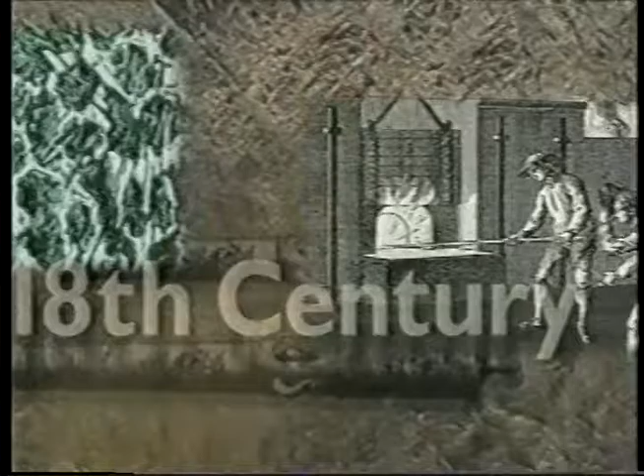Whiteheart malleable iron developed in France. Blackheart malleable iron developed in the U.S. Steel casting process developed in U.S. and Europe. The ancient art of heat treatment is scientifically studied. A novel new heat treatment called austempering is patented by Davenport and Bain in the U.S. The austempered microstructure in cast iron is first documented by Flynn and others.

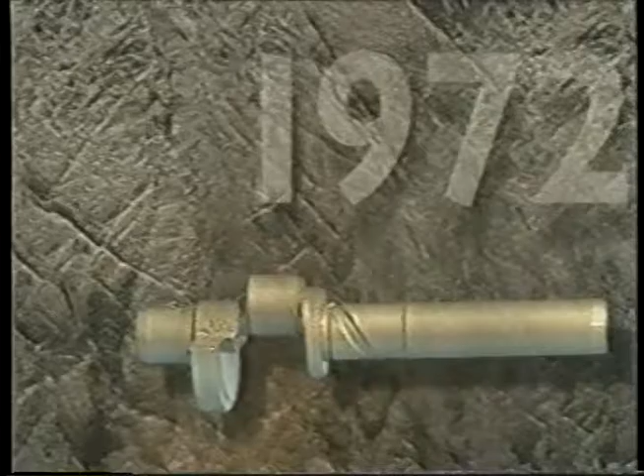Ductile spheroidal graphite iron developed concurrently in the U.S. by Millis and in the U.K. by Morrogh. First production ADI component designed and engineered by Tecumseh Products and produced by Wagner Casting Company. General Motors installs ADI rear differential gear sets in passenger cars, realizing a 20% cost savings.

Specialized high-volume batch austempering equipment developed by Applied Process Incorporated and Atmosphere Furnace Company. ASTM specifies 5 standard grades of ADI in both English and metric units. After centuries of metallurgical evolution and decades of equipment technology development, the focused efforts of scientists and engineers have brought these technologies together as ADI, the new benchmark material.

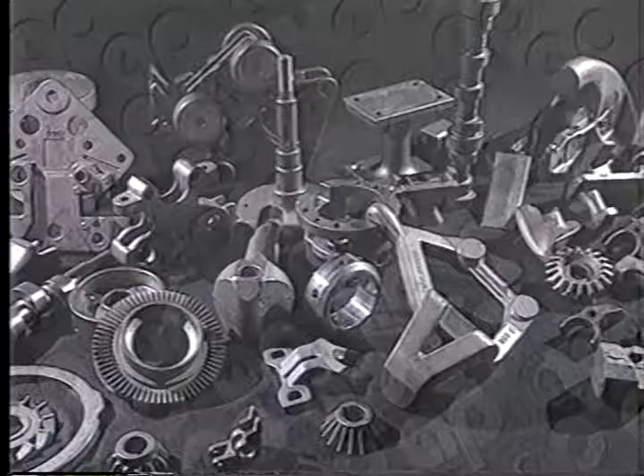Today, there is an increasing demand for these high-performance ADI components, and Applied Process Technologies Division and its affiliates are meeting that demand worldwide, with U.S. locations in Michigan, Wisconsin, and Kentucky, and international affiliates in England and Australia.

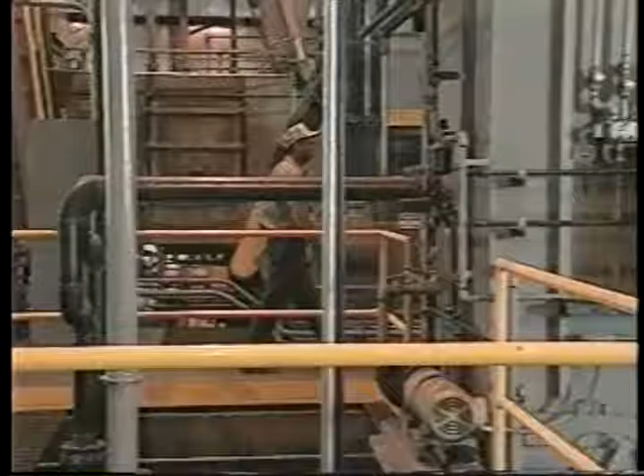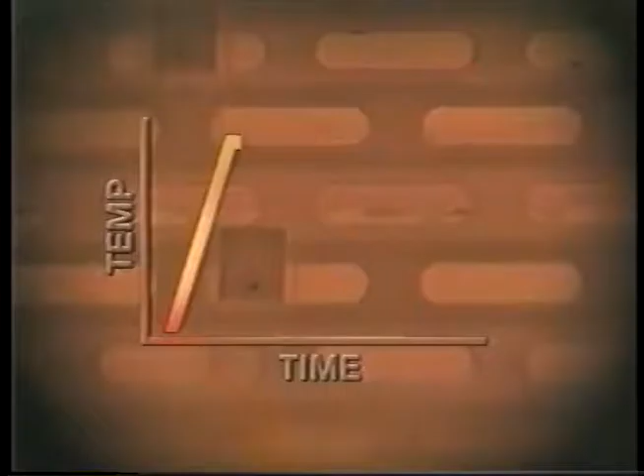The austempering process is a specialized heat treatment. When applied to ductile iron, it consists of the following. Heating the component to a suitable temperature in the range of 825 to 950 degrees centigrade. Holding the component at that temperature for a time sufficient to homogenize the structure. Rapidly cooling the part to the appropriate austempering temperature in the range of 175 to 400 degrees centigrade.

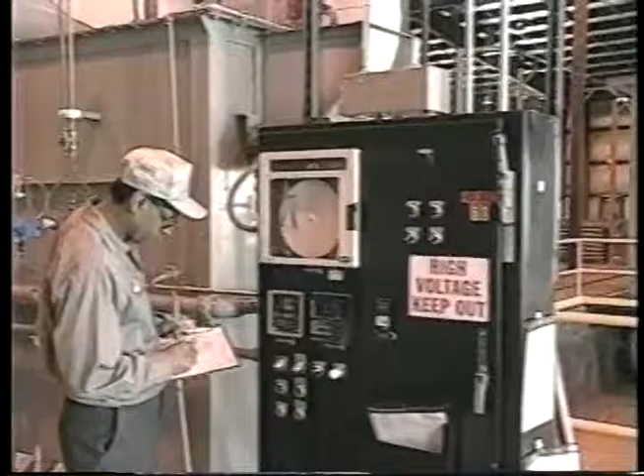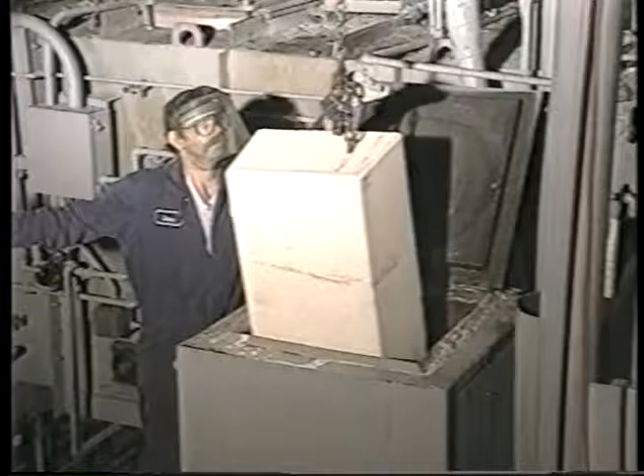Holding the component at the austempering temperature for the time necessary to produce the desired ausferrite matrix and then cooling to room temperature. This can be accomplished in various types of equipment, such as this atmosphere furnace with a specially pressurized integral quench using molten nitrate nitrite salt that is non-toxic and 100% recyclable.

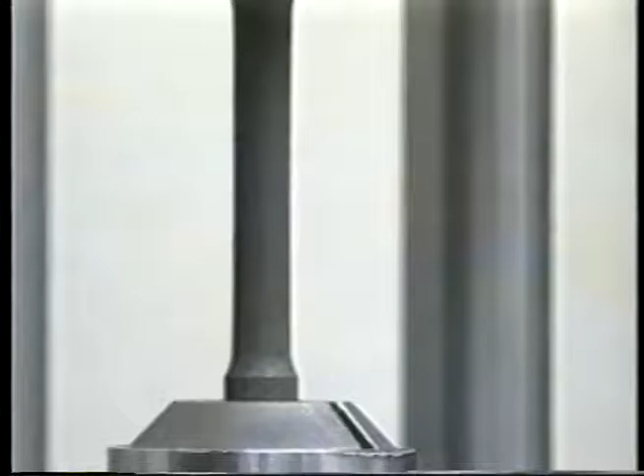The austempering cycle is affected by the component's configuration and the chemical and microstructural characteristics of the iron. Therefore, the knowledgeable heat treater provides an added benefit for the foundry, the machining source, and the end user at meetings held early in the design cycle.

By quantifying, testing, and establishing the correct material process combination for the specific product, the optimum process and property results are achieved. Using specially designed equipment and advanced process control techniques, the heat treater assures lot-to-lot consistency of the product and delivers the desired high-performance properties of the material.

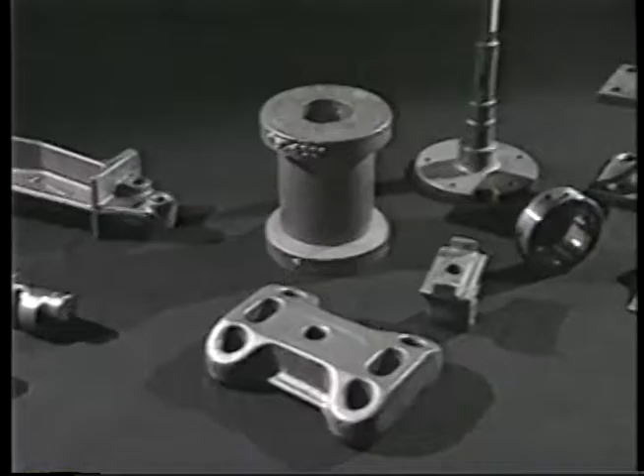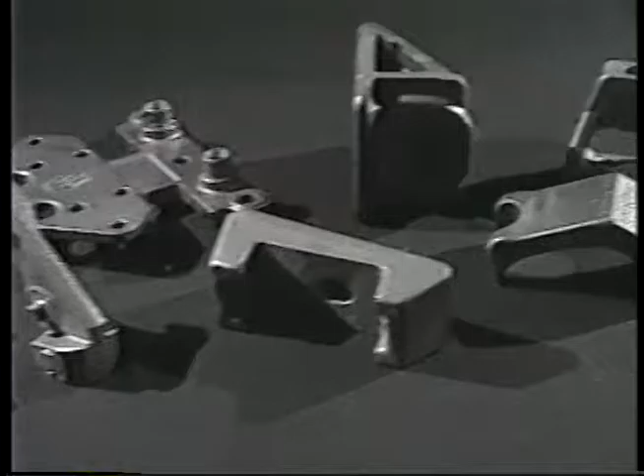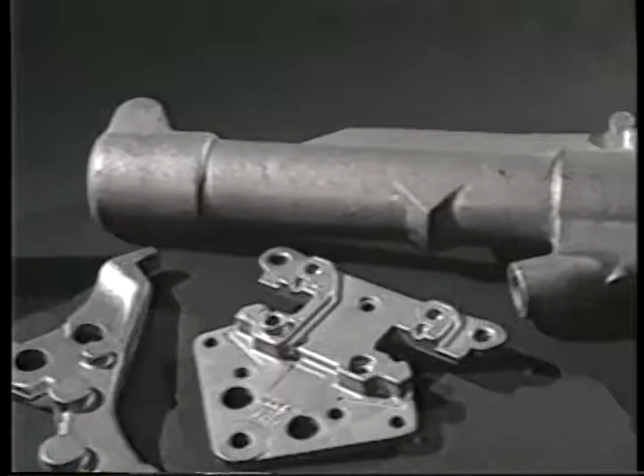Compared with conventional grades of ductile iron, ADI has over twice the strength for a given level of ductility. ADI has remarkable wear resistance for a given hardness level when compared with other materials. The ductile iron casting process uses recycled ferrous materials. Ductile iron can be easily cast into complex shapes. Therefore, ductile iron is a near net-shape technology.

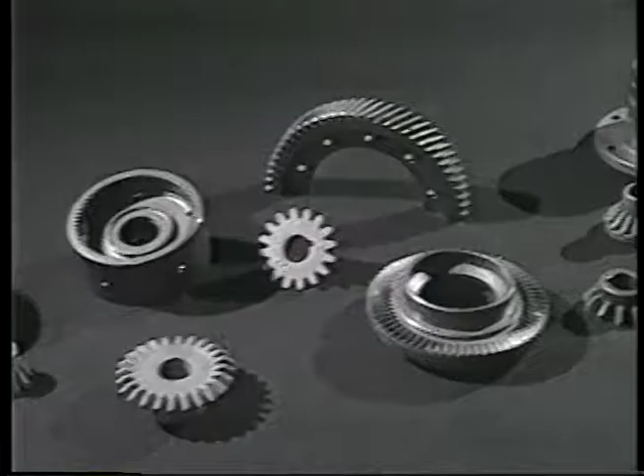In turn, the austempering process produces highly repeatable dimensional response, thus giving the manufacturer significant flexibility in manufacturing. ADI has excellent dynamic properties, which can be greatly enhanced by fillet rolling, shot peening, and grinding. Its gear properties make it competitive with carburized steel. ADI's noise damping capabilities provide quieter running components that are superior to both steel and aluminum.

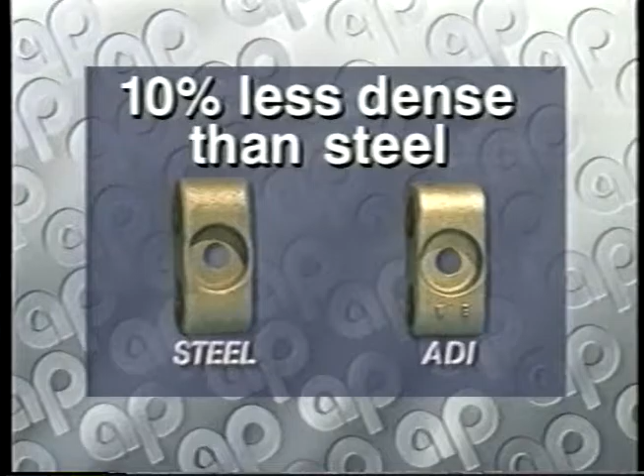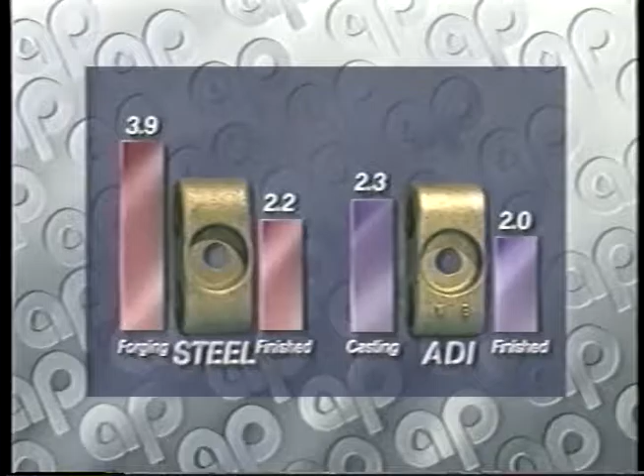ADI is 10% less dense than steel. Thus, even for a given shape, an ADI component will be 10% lighter. Because of its excellent castability, ductile iron can be cast to a nearer net shape than either a steel casting or a forging. Therefore, not only will you buy less material, you will machine away less, and the resultant part will be lighter in weight.

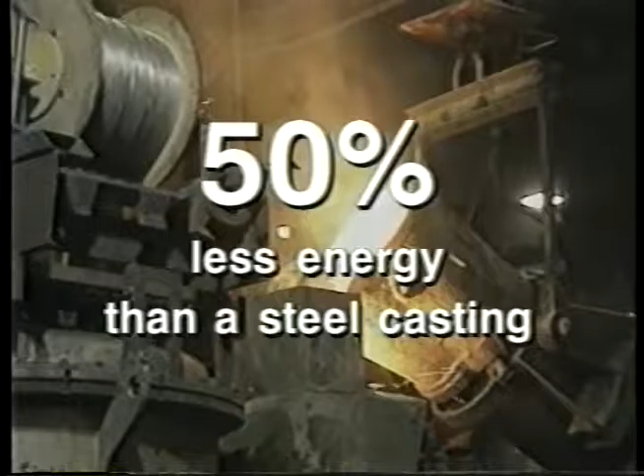An ADI component uses 50% less energy per unit of weight to produce than a steel casting, and 80% less energy than a steel forging. And ADI is stronger than microalloyed forged steel with comparable fracture toughness.

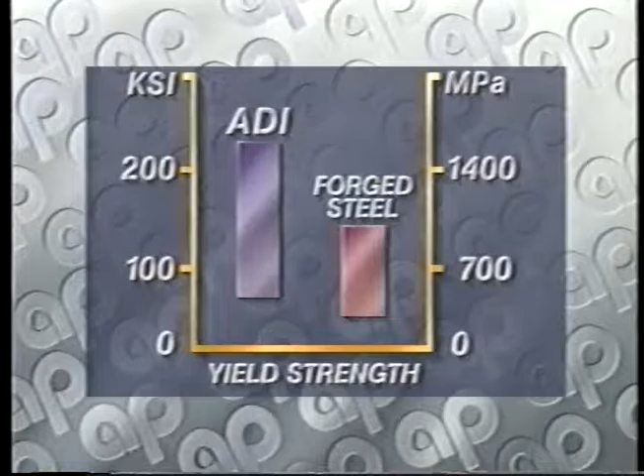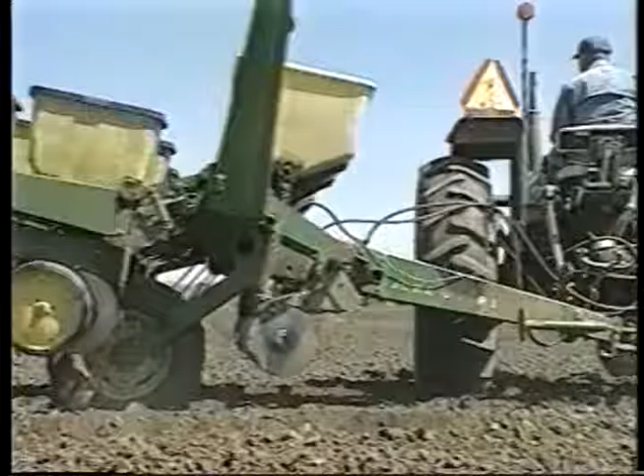Because of ADI's unique ausferrite matrix, for a given level of hardness, it will exhibit significantly better wear resistance than conventionally hardened steel. ADI has successfully replaced manganese steel and carburized steel in many wear applications.

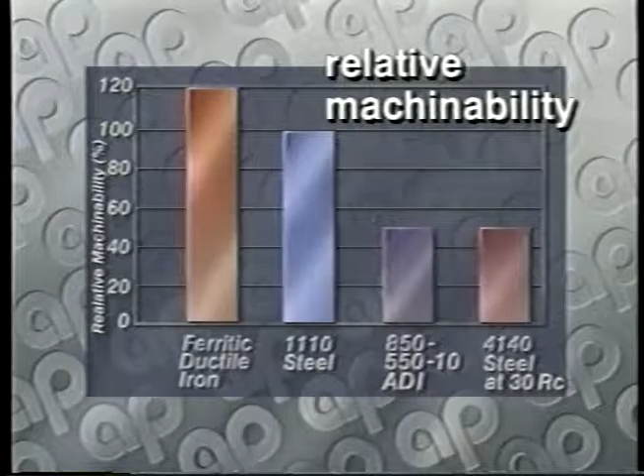Ferritic ductile iron has better machinability than even free machining steel, creating significant savings in the machining process. By machining components in the ferritic condition and austempering after machining, machine feeds and speeds are increased and tool lives are greatly extended. In addition, machining of ductile iron produces a small discontinuous chip that can be easily stored and recycled.

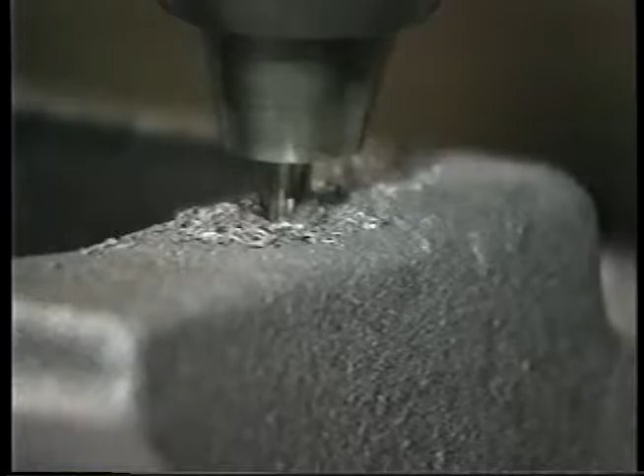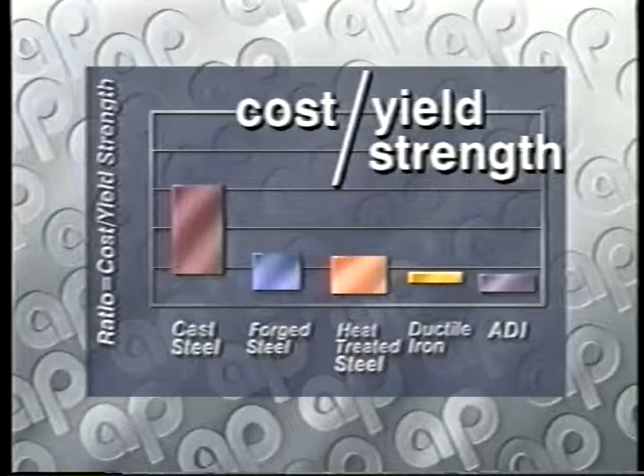While prices vary worldwide, on average, ductile iron castings cost significantly less than steel castings or forgings. In North America, when the cost of austempering and transportation is added, the price of an ADI component is typically 20% less than a comparable steel forging or casting. Additional savings are realized by machining in a soft, as-cast condition.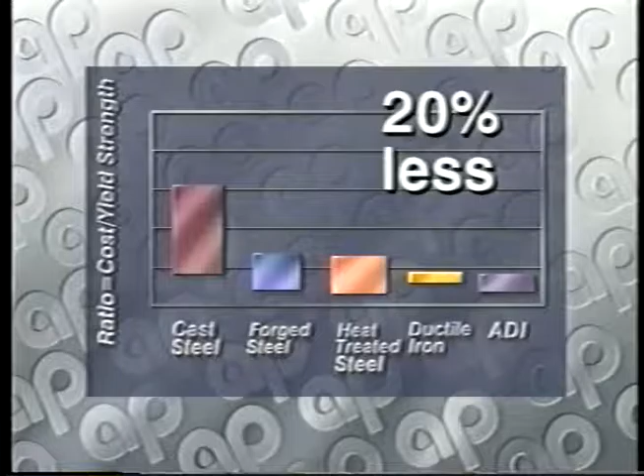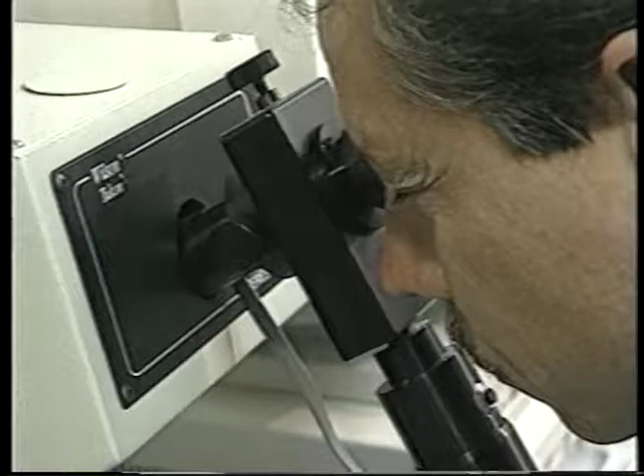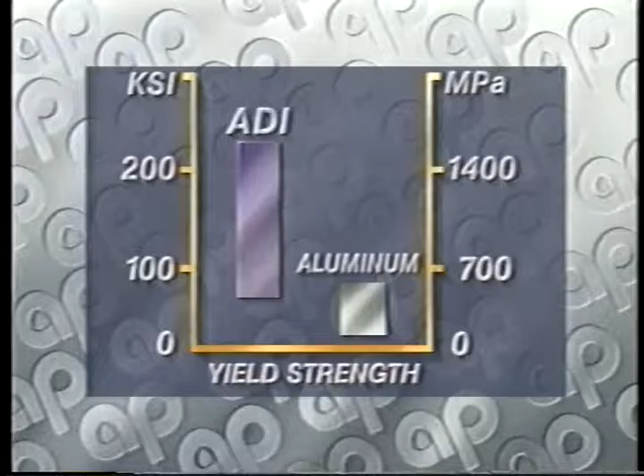Today, when one thinks of lightweight materials, aluminum comes readily to mind. But low density alone does not necessarily make the lightest component. ADI is typically more than 3 times as strong as the best aluminum castings and forgings, and ADI weighs only 2.5 times as much. Additionally, ADI has over twice the stiffness of aluminum. That means that a properly designed ADI part can replace an aluminum part at a weight savings. Given that aluminum can cost up to 10 times as much per unit weight, the cost benefits of ADI become apparent.

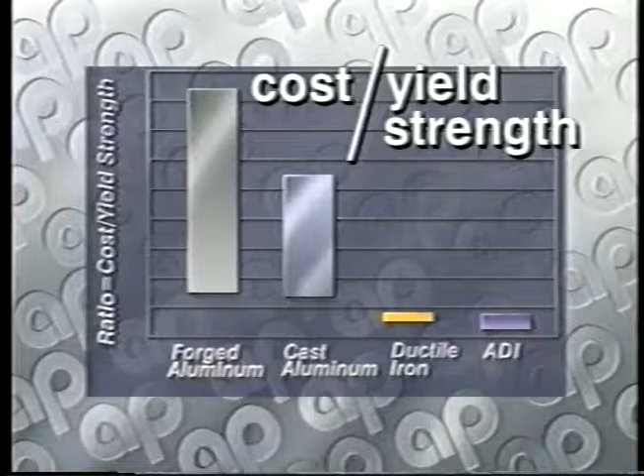ADI is now being applied in virtually all markets. The heavy truck industry utilizes ADI components in suspensions, engines, transmissions, wheel hubs, and bracketry. The light car and truck industry utilizes ADI for camshafts, crankshafts, timing gears, suspension components, constant velocity joints, differential cases, differential gear sets, and transmission components.

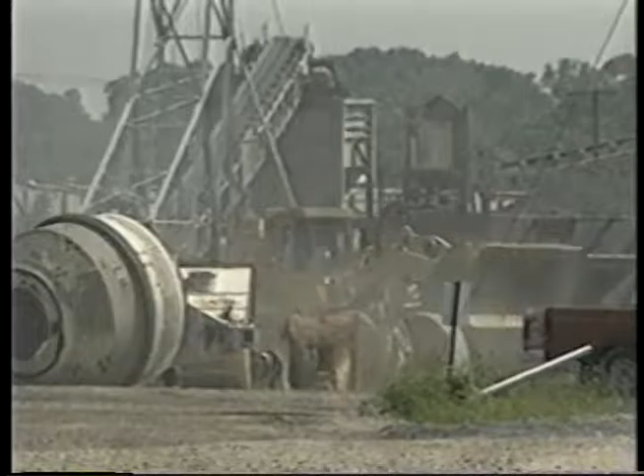The construction and mining industries employ ADI components for bucket teeth, chain sprockets, ore crushers, jackhammers, bridge and highway parts, ground engaging and structural components, and a wide array of hardware. The industrial and material handling industries utilize ADI for conveyor components, pump components, structural components, wear plates, trolleys, gears, and other hardware. The railroad industry uses ADI for suspension components, car wheels, maintenance vehicle components, and truck and car hardware.

The agricultural industry uses ADI for plow points, till points, fertilizer knives, PTO components, grain transport and grinding, and tractor and implement components. The defense industry is utilizing ADI for medium-duty track and suspension components and various armor and ordnance applications.

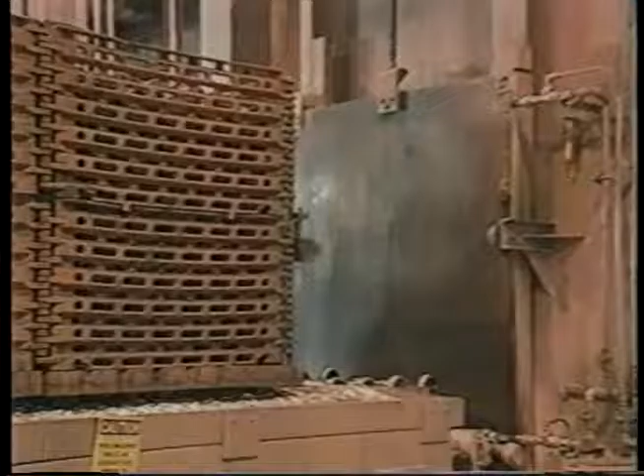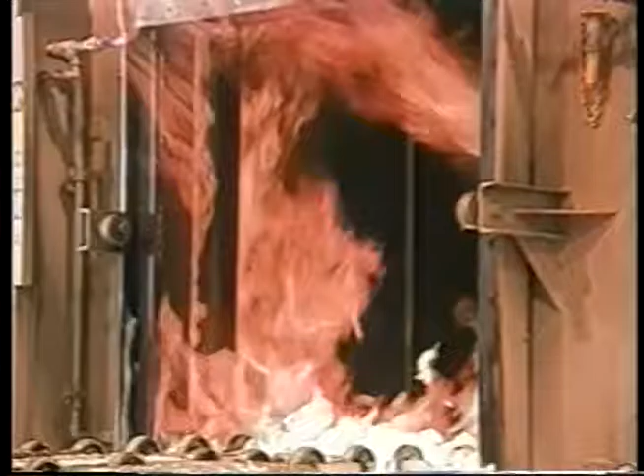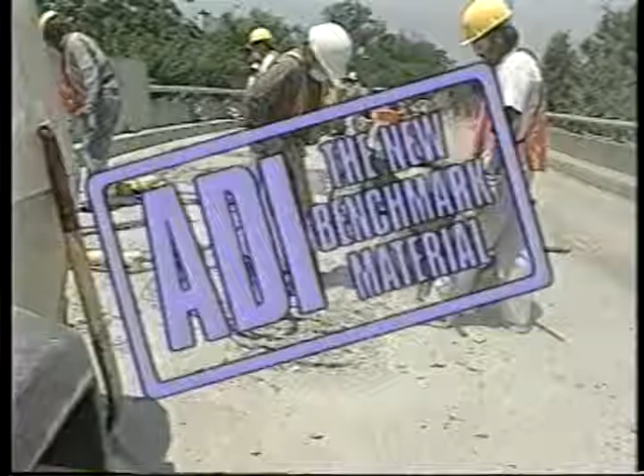By varying the austempering process, a wide range of properties can be delivered. From tough dynamic structural components to hard wear-resistant parts for high-wear applications, Applied Process and its affiliates can make ADI work for you. When compared to other metals for strength-to-weight ratio, ADI is the new benchmark material. When compared to other metals for manufacturing flexibility and wear resistance, ADI is the new benchmark material.

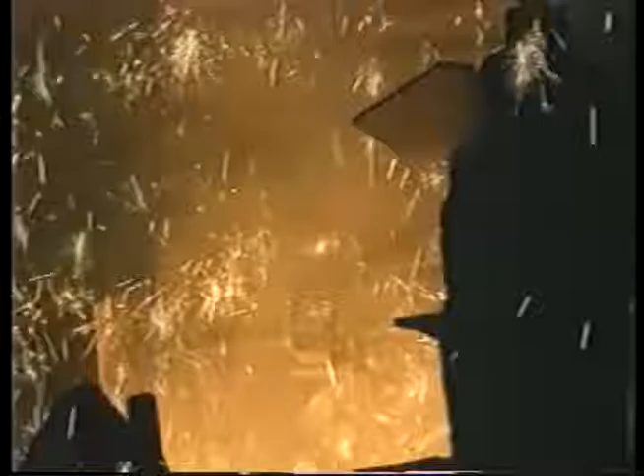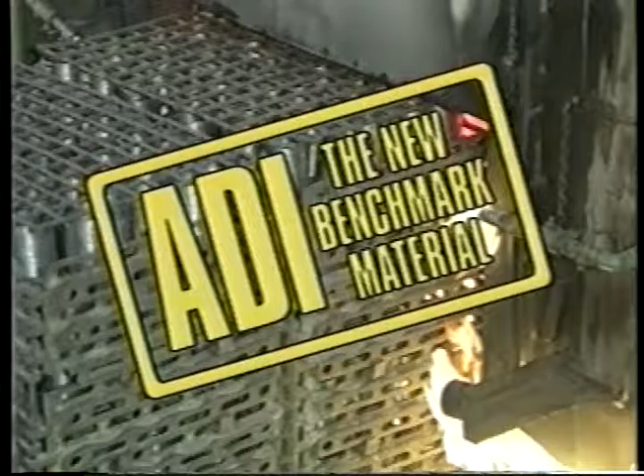When compared to other metals for low energy consumption and recyclability, ADI is the new benchmark material. When compared to other metals for low manufacturing cost, ADI is the new benchmark material. When considering a high-tech material for your high-performance components, choose ADI, the new benchmark material.